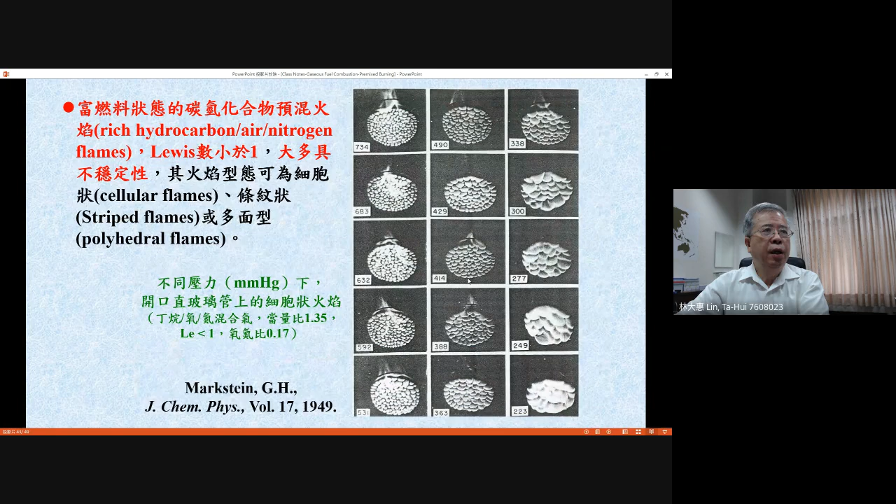Okay, and we call this a so-called polyhedral flame. Polyhedral means you have some surfaces and they connect together to form the total surface. This is the third case we have. Cellular flame is the first case I introduced to mention flame instability. The second one is a striped flame, shown in the coaxial stagnation point flow. And this is the third one, a polyhedral flame, which you can see from the Bunsen flame burner.

And this basically is a diffusion flame, because the mixture of butane and air is rich, so you will have some excess fuel left in the downstream of your rich premixed flame, and then a diffusion flame out in the downstream. Okay. Now the main thing is, this is a typical example of flame instability based on our discussion of diffusional-thermal instability instead of the hydrodynamic instability introduced by Landau.

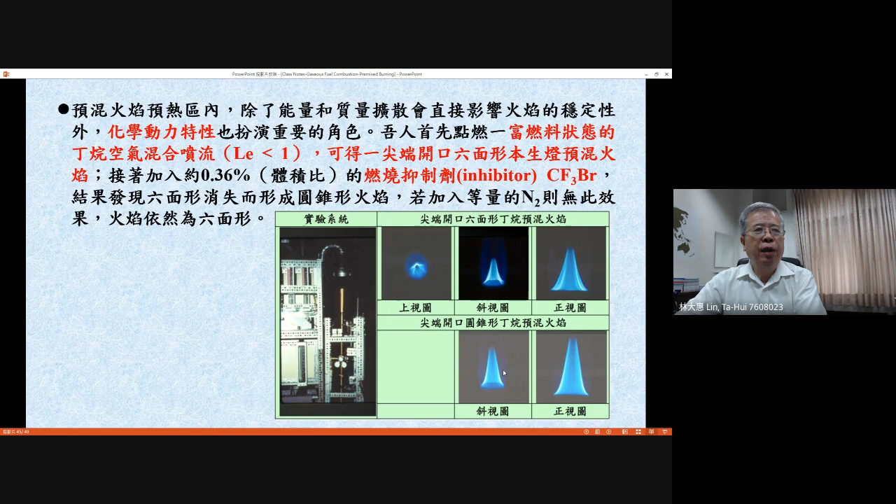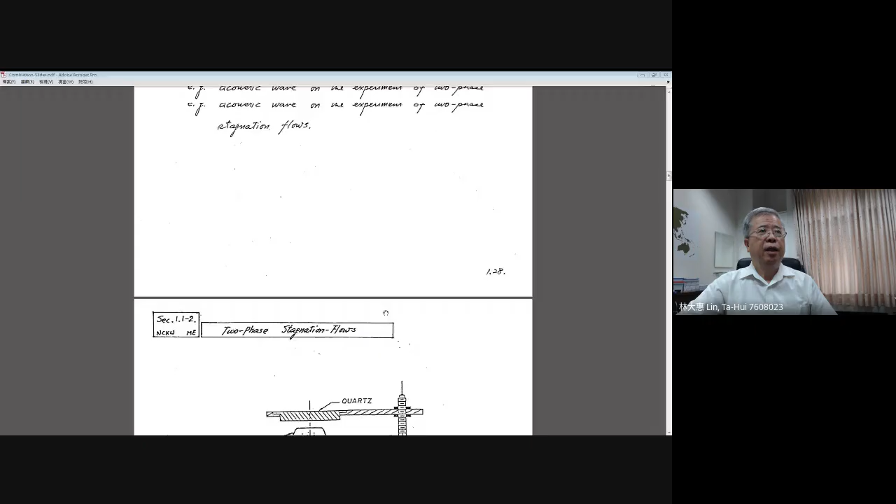Okay, now we need to go back to our slides to tell you which slide we are on. Okay, we already finished up to page 1.28.

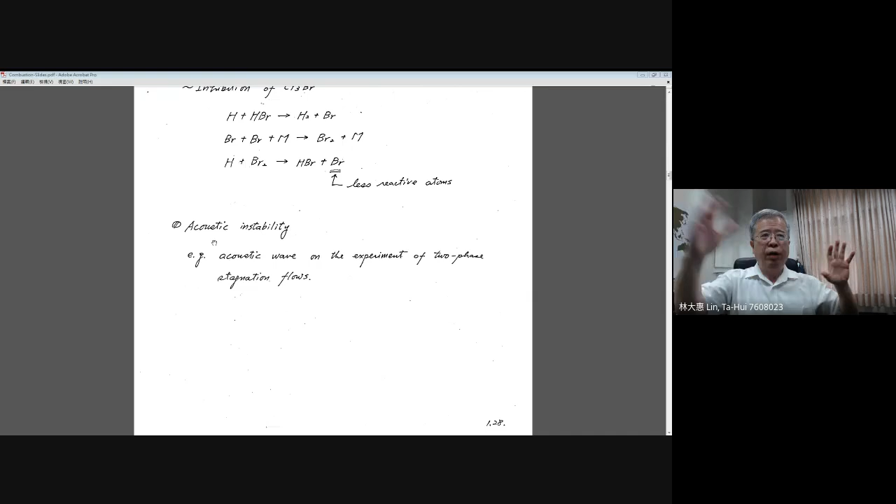And then there is an additional small subject I do not want to talk about in much detail. There is some kind of influence coming from acoustics. That means if you have a sound, those acoustic waves will give you some influence because there is a wave, right? And you realize a premixed flame is a wave, a propagation, right? It's a diffusional wave, and those waves will meet together. When acoustic influence comes in, they will produce some kinds of instability. But I do not want to talk about that too much.

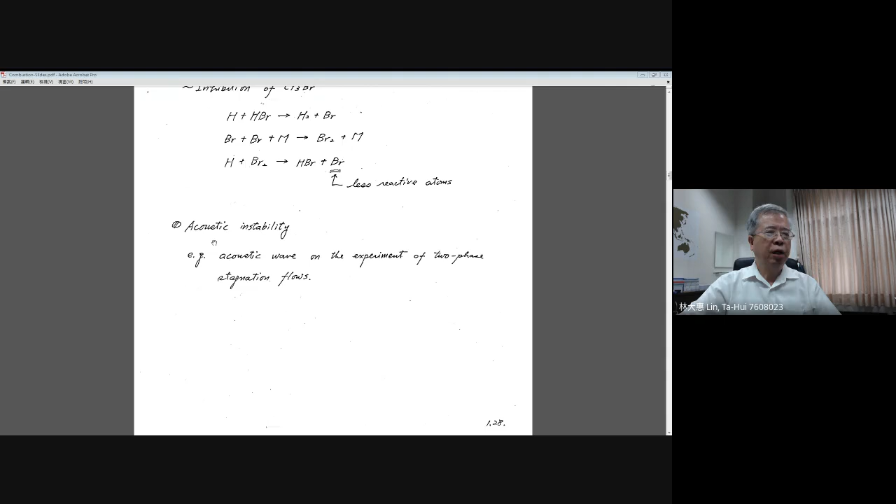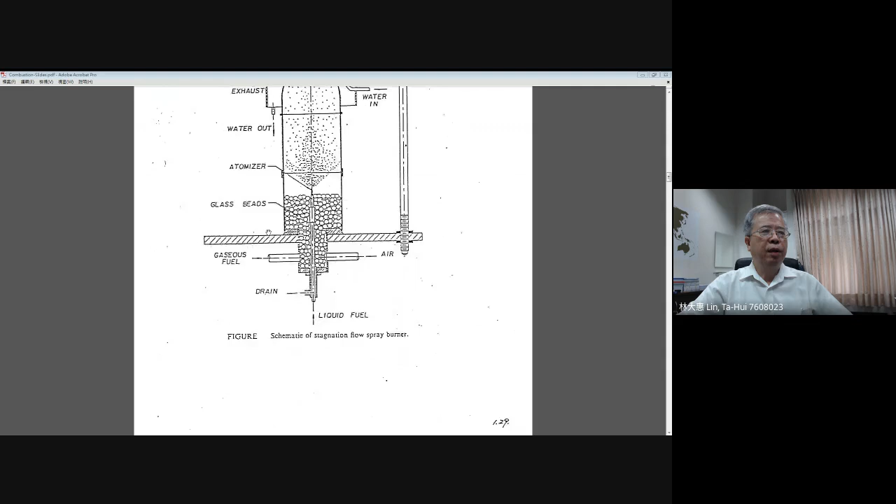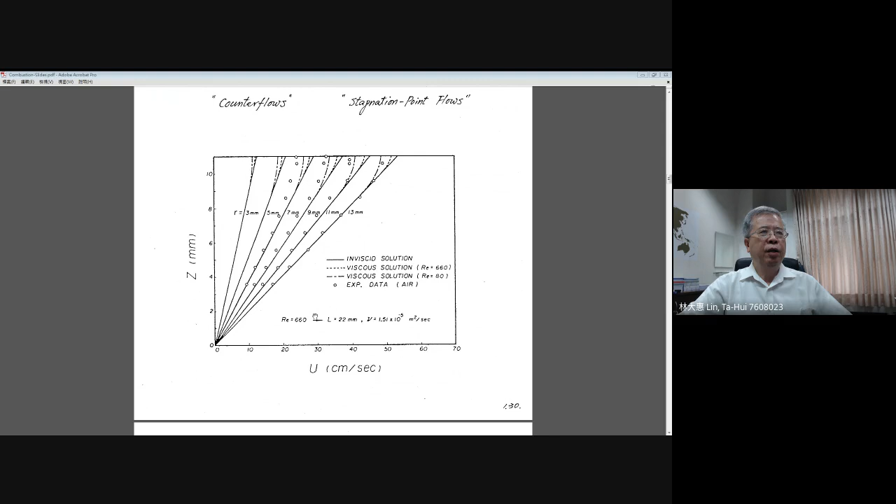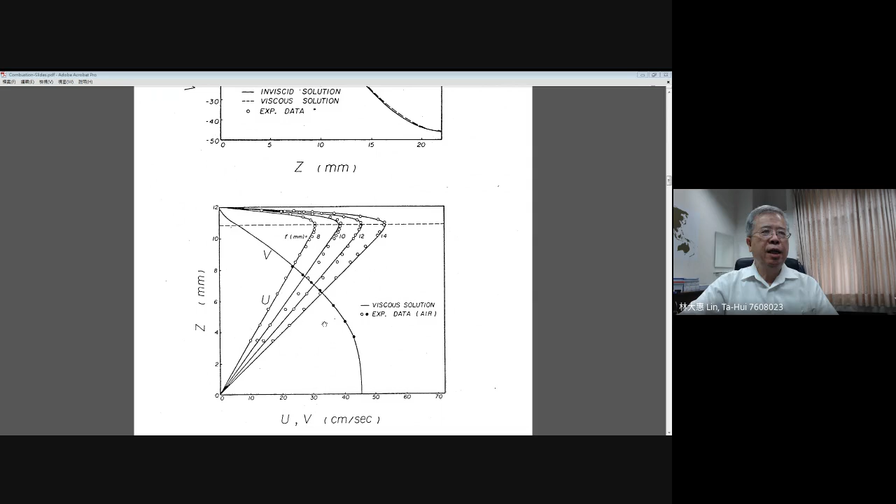But remember, starting from page 1.29, we go back to the previous discussion on the cold flow structure described by the two-phase stagnation flow, as you remember. We use the experimental data to compare with the theoretical and numerical predictions. These figures show the radial velocity distributions for different radial distances, and this is the axial velocity distribution. This one represents the axial and radial velocity distributions in the stagnation point flow. Those cold flow structures can be used to estimate where your premixed flame is.

You should practice to learn how to estimate the position where a premixed flame can be stabilized in the stagnation point flow or opposed jet flow by using the radial and axial velocity distribution in this cold flow. I always try to give you the basic understanding: when you analyze a burning flame, a reactive mixture, you need to study the cold flow. Cold flow means no combustion, just flow, and you analyze the flow structure. Then you bring your basic knowledge on determining the premixed flame position.

I hope you understand how to determine the position of a premixed flame, right? At this location, the supply of your premixture just balances with the consumption of your premixed flame. Then the flame will sit at this position. In this sense, at this position, the flame speed is just balanced with the supply velocity. By this concept, you can use the cold flow to identify where the flame sits.

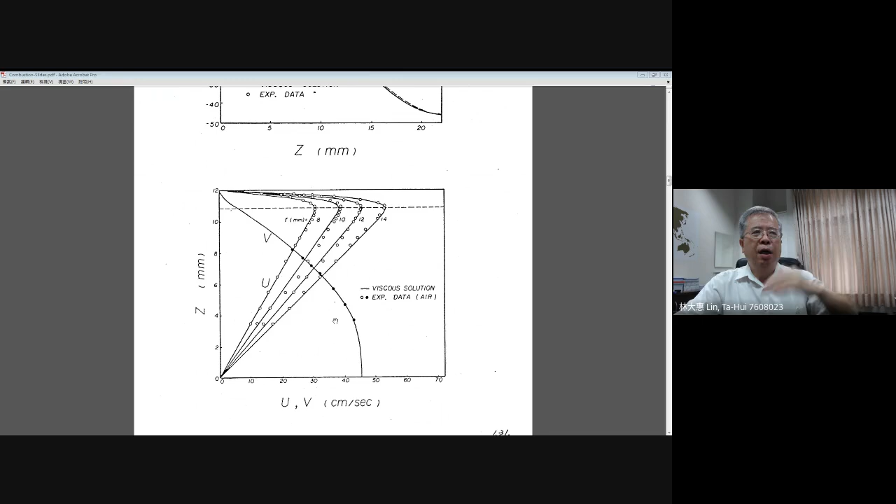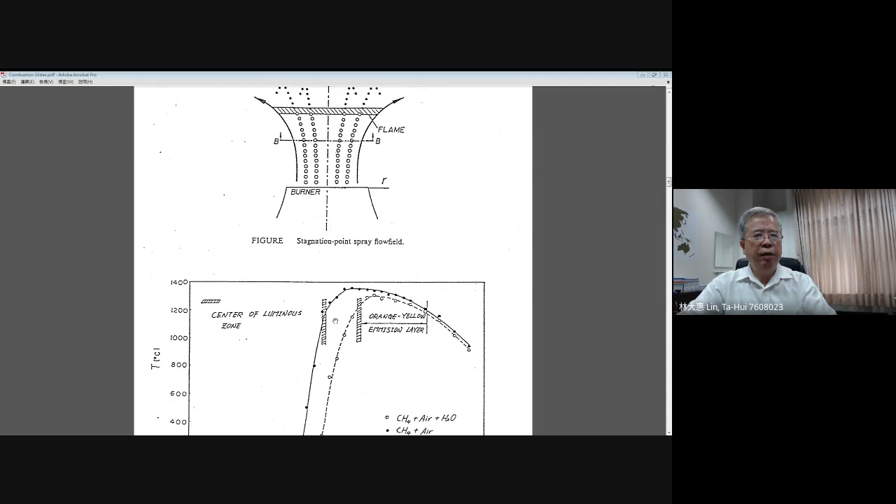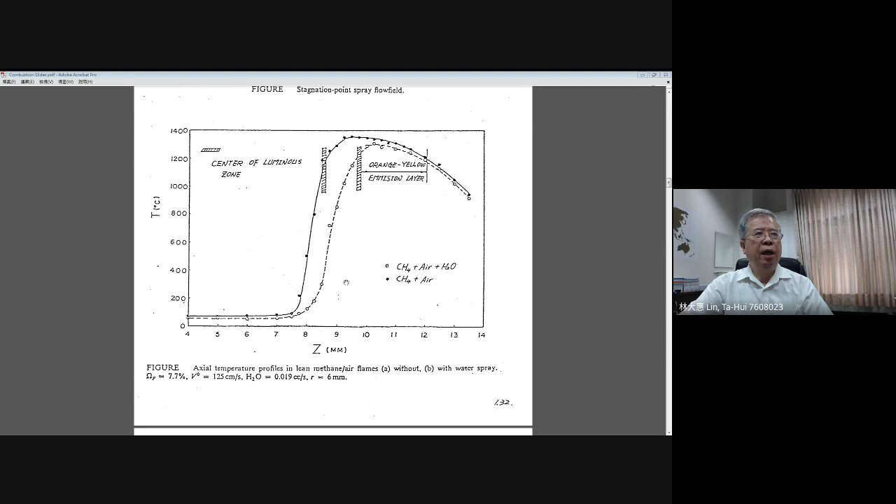Next, when you ignite it, there is a comparison of the flow characteristics for burning and non-burning structures, as I explained previously. This is the temperature distribution for the methane flame with water and without water. And there are the axial velocity and radial velocity variations for the methane premixed flame with water or magnesium oxide, which we already explained in detail. I hope you can go through it again and think about how the flame influences the flow structures in the stagnation point flow.

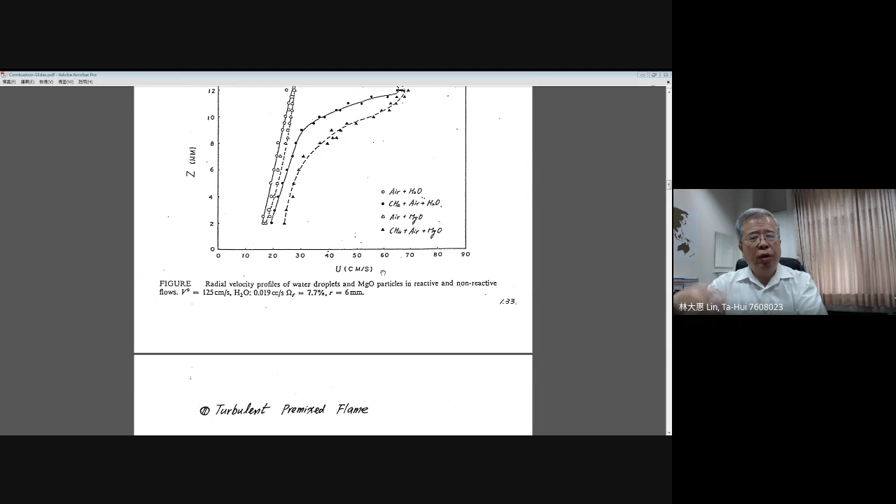Next time we will give you some introduction to turbulent premixed flames, and we'll end the premixed flame burning section. Then we will go to the diffusion burning section. Now we stop here. I mention those experimental results as I explained earlier; you need to use them. I will give you an assignment. You need to practice identifying where the premixed flame position is in the stagnation point flow, or maybe in the Bunsen flame.